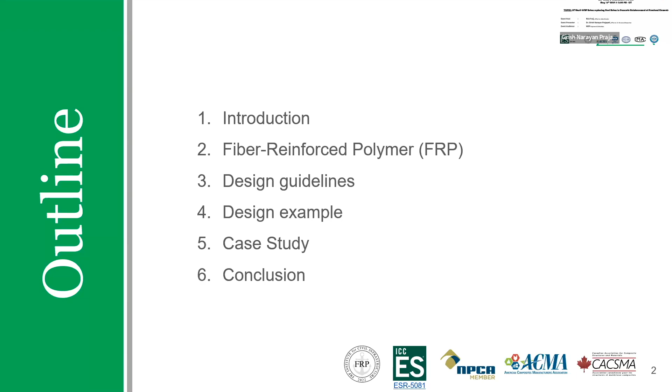So about our company, our products are mostly designed in Canada and are manufactured in China by Sandok Safety Industries Co. Limited, which is specialized in manufacturing fiber reinforced polymer products.

So we work with national and international engineering firms. We work with them through the design process and help them with the fiber reinforced polymer design standards, whether they are in Canada or in the United States. So we also focus on parking facilities, water treatment plants, and retaining walls. And our main focus is on the glass fiber bars and the carbon strap applications.

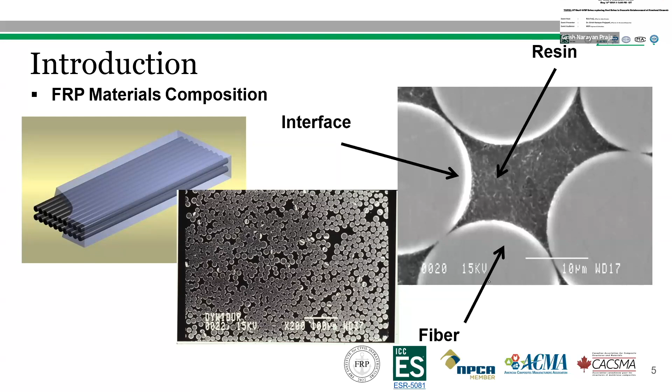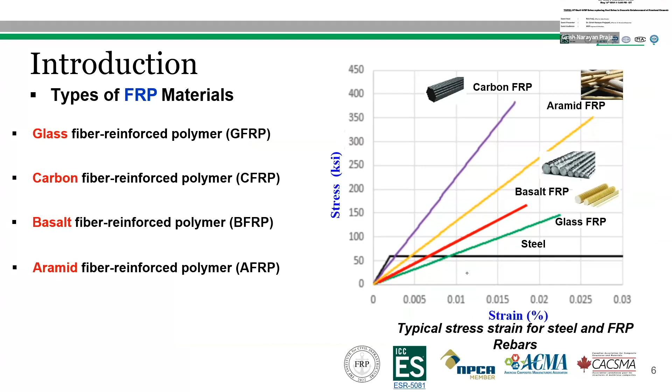There are 4 different types of fiber used in FRP reinforced polymer bars: glass, carbon, basalt, and aramid. Their stress-strain properties in comparison with steel bar are shown in this figure. So we can produce different types of FRP products depending on the project requirements.

Some of the FRP bars we produce are generally straight bars, spiral, stirrups for transverse reinforcement, bent bar, and glass fiber reinforced polymer shear connectors. The shear connectors are used in ICF walls.

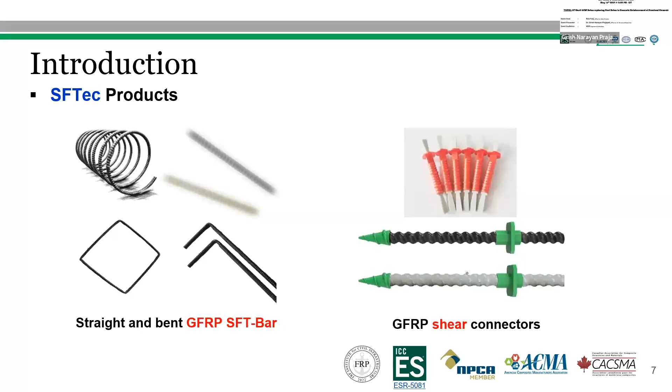So why should we use a GFRP bar instead of a steel bar? Here are some advantages of the glass fiber reinforced polymer bar over the steel bar. It has longer service life because of its corrosion resistance, therefore improved durability in harsh environments such as construction near coastal areas and in North American cold climates. The FRP bar has better resistance against corrosion compared to the steel bar.

The tensile strength of FRP bar is around 2 to 3 times more than that of the steel bar. I'm talking about the glass fiber reinforced polymer bar. If you consider carbon, it has even more tensile strength compared to the steel bar.

However, it is lightweight because of its low density compared to the steel bar. Due to corrosion resistance, FRP bars are good for harsh chemical environments, which we have in Canada, because of the cold we have to put alkaline salt during winter. It is also neutral to electrical and magnetic disturbance, useful for applications such as airports, military applications, and MRI rooms in hospitals.

Coming to the second section of this presentation about fiber reinforced polymer bars. There are different fiber external surfaces of FRP bars available in the market.

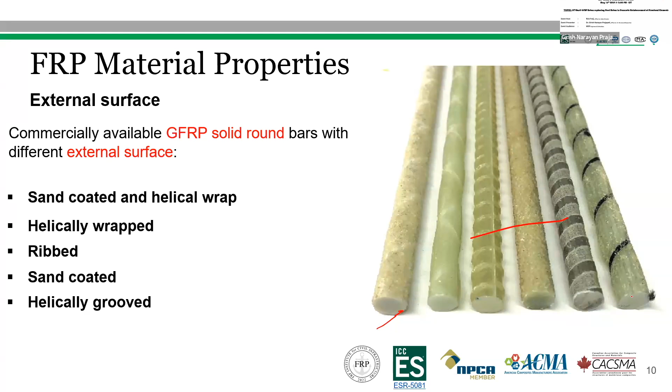Different available FRP bar shapes for reinforced concrete structures are straight bars, bent bars, and spirals. The Canadian and American material specifications such as CSA S807, ASTM D7957, and D8505 set minimum qualification and quality control properties for GFRP bars.

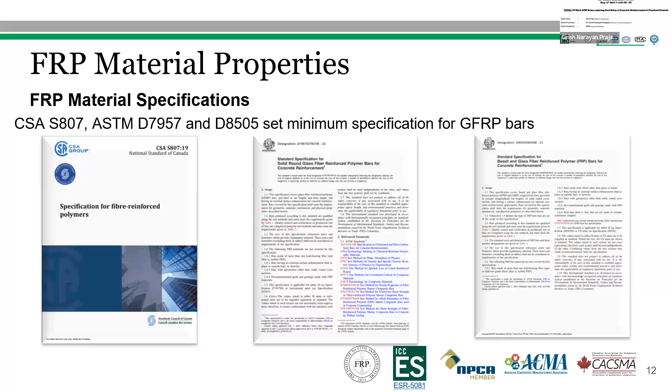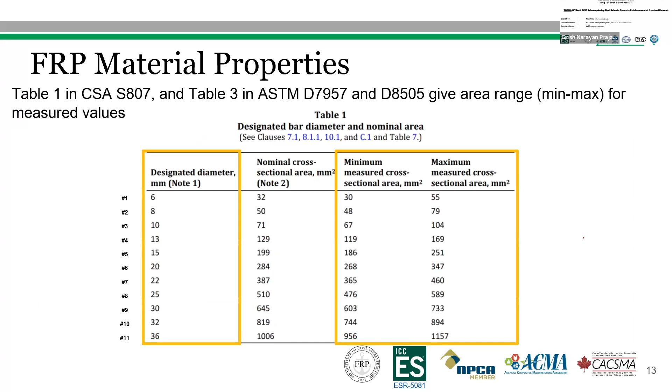So we'll go through them. Same as the steel bars, Table 1 in CSA S807 and Table 3 in ASTM D7957 and D8505 provide GFRP bar diameter and area range for measured values for any GFRP bar external surface.

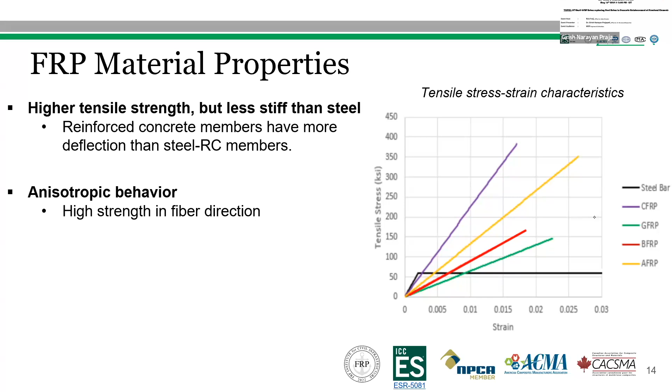FRP bars have high strength in fiber direction due to anisotropic behavior. The stress-strain behavior of FRP bars is linearly elastic up to failure, so they don't provide any ductility. However, this can be overcome by providing hybrid reinforcement of steel and fiber reinforced polymer bar. Current research is ongoing to implement hybrid reinforcement for the new ACI 440 design code.

Since the glass fiber reinforced polymer bar doesn't have any yield point, the guaranteed tensile strength of GFRP bars varies between 550 to 1350 megapascal. The guaranteed tensile strength is found by subtracting 3 times the standard deviation from the average tensile strength.

The GFRP bar has a lower average elastic modulus, varying between 45 to 60 gigapascal, and the guaranteed ultimate tensile strain of GFRP bars varies between 1.2 to 2.5%. Generally, this variation depends on the amount of fiber and resin content.

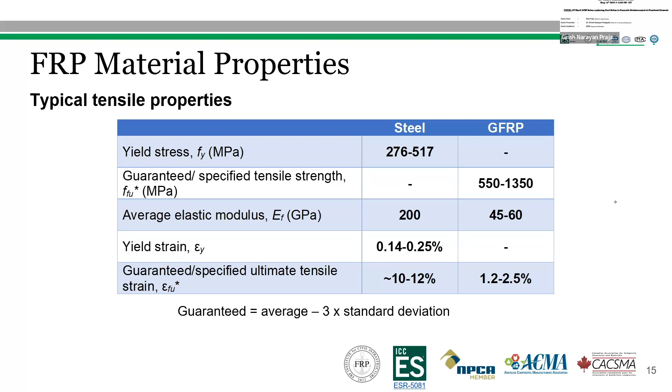The design tensile strength of the GFRP bar is calculated by multiplying a resistance factor, which is equal to 0.75 in CSA S806. This value was generally introduced in 2012, and the CSA S806 has not been updated since; it's only been reapproved until 2021.

In the next provisions, in the next updation of CSA S806, the value will be increased to 0.85. The latest ACI 440.11 design code uses an environmental reduction factor equal to 0.85, which is based on a research paper published in 2020.

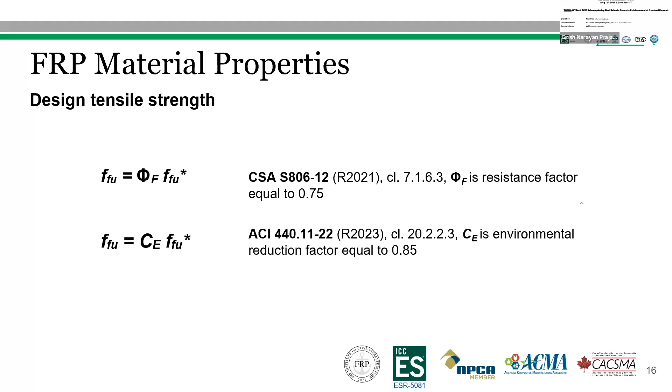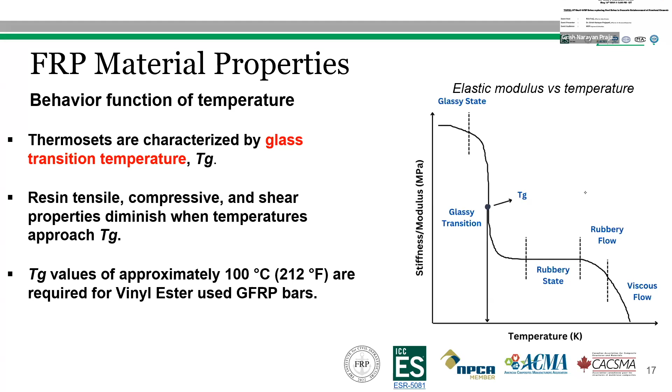A glass transition temperature of 100 degrees Celsius is required for vinyl ester, typically used in glass fiber reinforced polymer bars, and a lower glass transition temperature generally results from moisture absorption.

The physical characterization of the FRP bar is done through a series of experimental tests. The important tests include fiber content, to know the fiber mass content of the FRP bar, and the major cross-section area and the water absorption of the FRP bars are provided. The details of these tests can be found in the ASTM standard provided here.

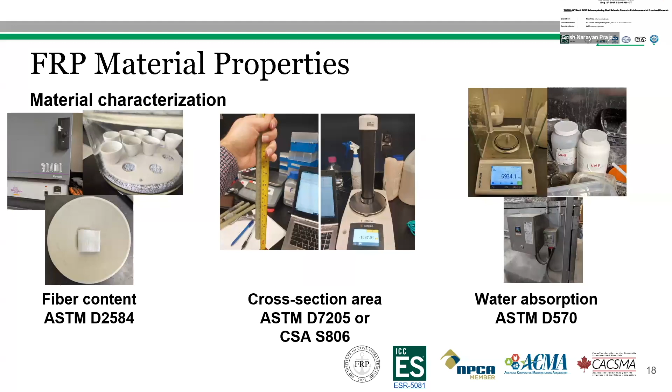The tensile properties of the GFRP specimen were tested in accordance with ASTM D7205 or CSA S806. The test specimen was prepared by installation of steel tube on both sides of the FRP bar using expansive cement. The tests were performed under a Baldwin testing machine, and the test load was applied until failure occurred.

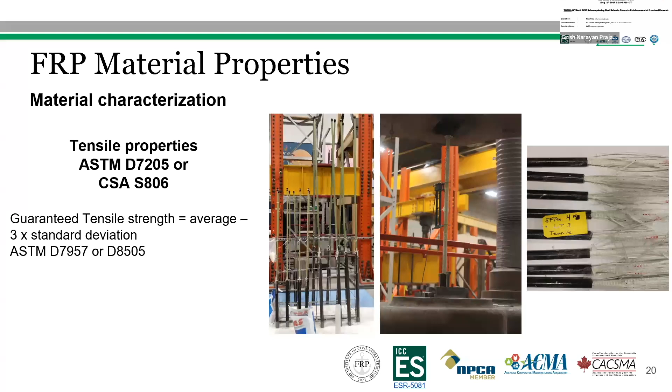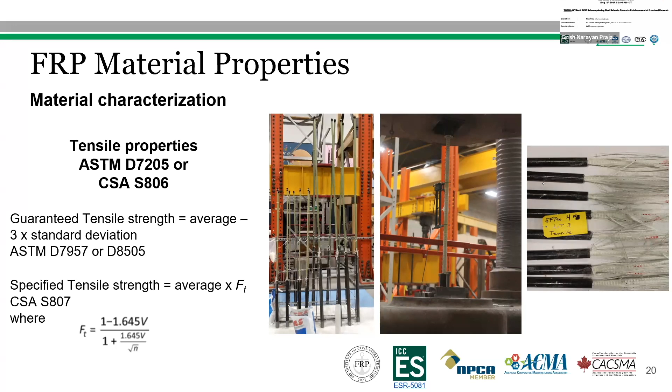According to ASTM D7957 or D8505, the guaranteed tensile strength was calculated by subtracting 3 times the standard deviation from the average tensile strength from the test. CSA S807 recommended use of specified tensile strength found by multiplying the average value with a factor FT. This factor is calculated by the following equation, where V is the coefficient of variation and N is the total number of samples.

The transverse shear strength and the horizontal shear strength of the GFRP bar were tested using an MTS universal testing machine. The displacement rate was selected to produce failure within 1 to 10 minutes, and the force was applied uniformly without subjecting the specimen to impact.

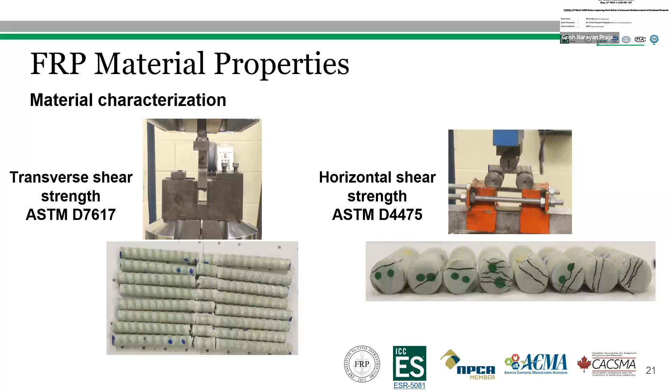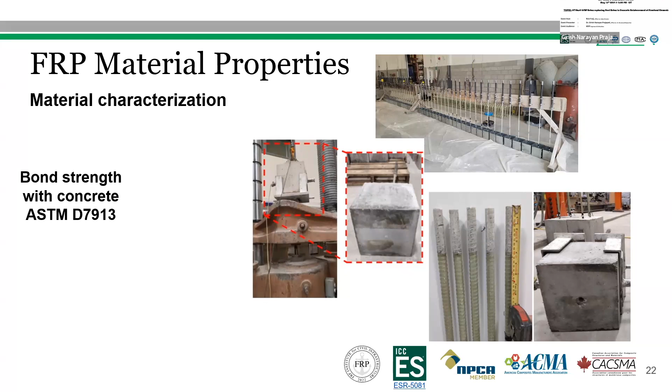Pull-out tests are performed to measure the bond strength between the reinforcing bar and the concrete. The GFRP bars were embedded in concrete blocks, and the concrete batch had a compressive strength of 35 megapascal. The pull-out test was conducted using a Baldwin testing machine, as shown in this figure.

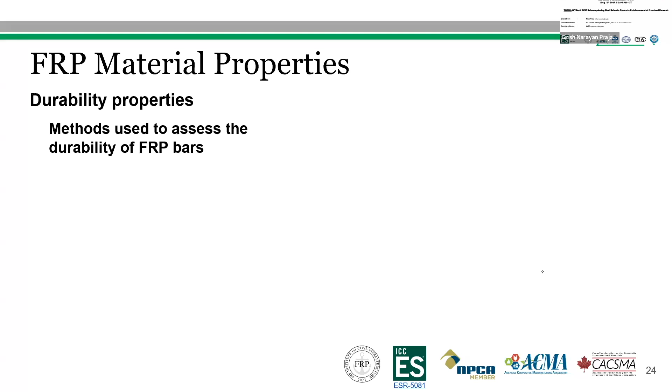The methods used to assess and validate the durability of FRP bars are accelerated aging or alkaline tests. In this case, we immerse the FRP bar in water with alkaline salt under high temperature, usually 60 degrees Celsius. This is a fast process, and testing is conducted after 3 months of immersion or exposure to the alkaline salt.

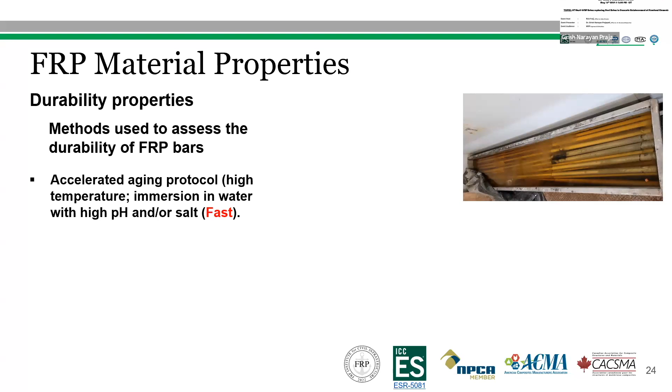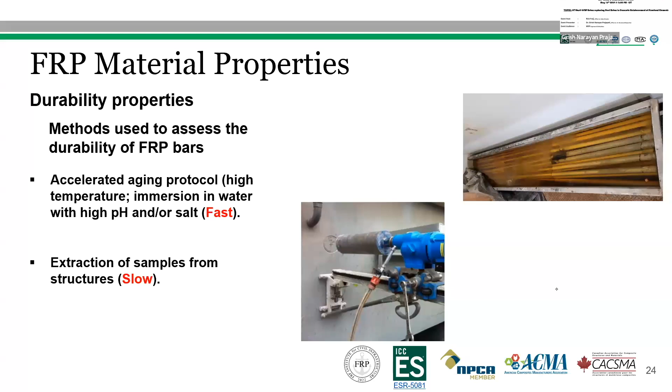The second process is the extraction of samples from the real structure. This is a slow process, and the test is conducted after 15 years of structure service.

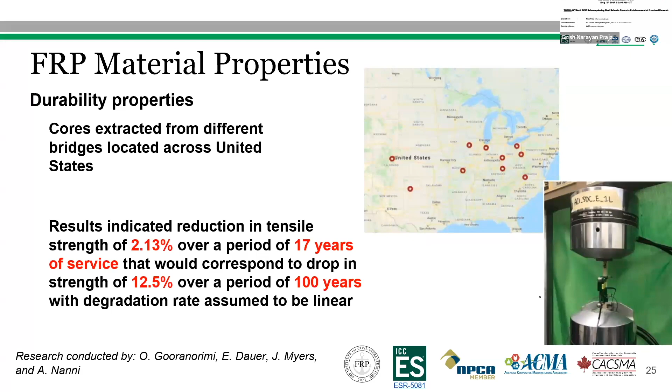The durability of GFRP reinforcement in concrete was assessed by extracting cores from different bridges located across the United States. The result indicated a reduction in tensile strength of 2.13% over a period of 17 years, corresponding to a drop in strength of 12.5% over 100 years, assuming a linear degradation rate. In the next section, we'll talk about the design guidelines.

The currently available design standards for design and construction of building structures with FRP bars are ACI 440.11 and CSA S806, where ACI 440 only recommends considering GFRP bars. For highway bridge design, the available design standards are AASHTO (2018 edition) and CSA S6, and chapter 16 of CSA S6 considers the FRP bar.

The assumptions made in the design of FRP reinforced concrete structures, according to both CSA S806 and ACI 440, are that plane sections before loading remain plane after loading, which means the strain developed in concrete is proportional to the strain developed in the FRP bar.

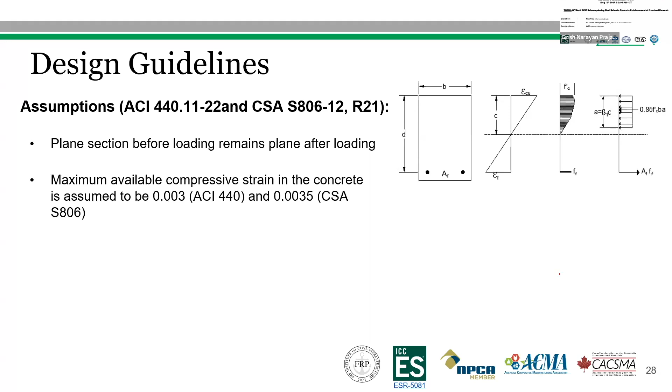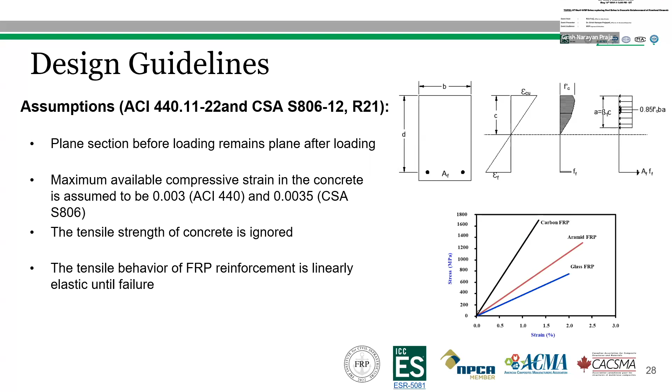The assumed maximum allowable concrete compressive strain is 3000 microstrain according to ACI and 3500 microstrain according to CSA S806. The rupture strength of the concrete is very low and should be ignored in the design. The tensile behavior of the FRP reinforcement is considered linearly elastic until failure, and a perfect bond is assumed to exist between concrete and the FRP bar.

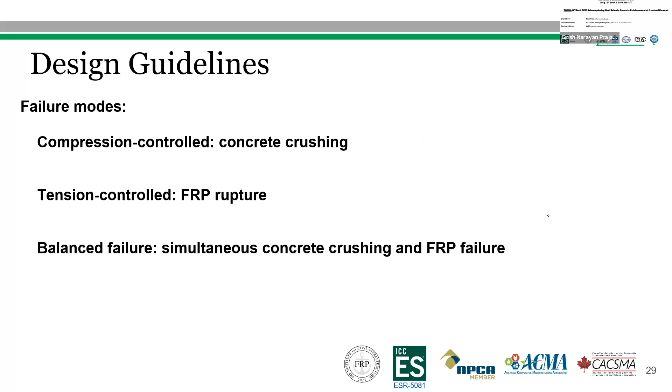There are three different failure modes in flexural members: compression control, tension control, and balance failure. We'll go through them one by one.

The compression control design of the flexural member will cause the concrete to crush prior to FRP rupture. Therefore, this section can be called an over-reinforced section, where stress in the concrete is non-linear.

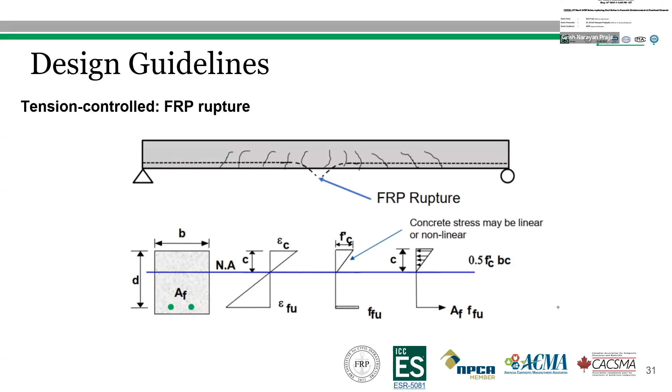In the tension control design, the FRP bar fails first in the flexural member, and the stress developed in concrete may be linear or non-linear, and the section is under-reinforced.

Simultaneous concrete crushing and FRP rupture occur in the case of balance failure.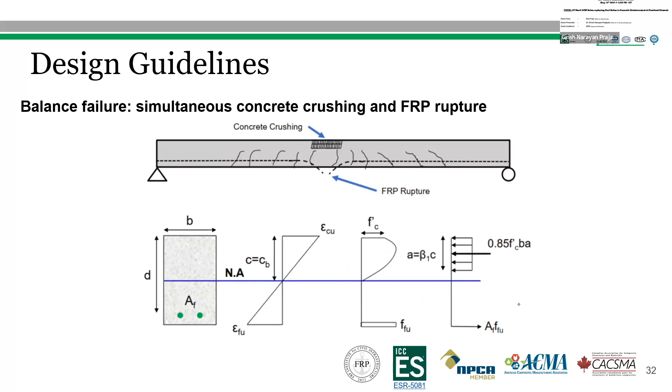The general considerations for the design of GFRP reinforced concrete flexural members are: the flexural capacity of an FRP reinforced concrete member depends on either tension or compression mode of failure, that is, FRP rupture or concrete crushing.

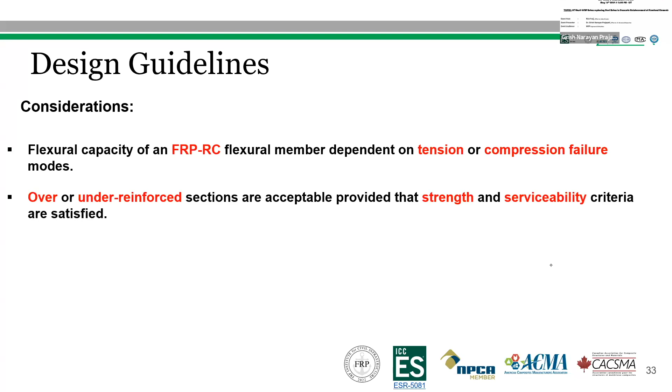Over-reinforced or under-reinforced sections are acceptable for the design. However, it should meet the strength and serviceability criteria.

FRP reinforcement is brittle, but it provides warning in terms of large member deflection. The flexural behavior of FRP reinforced concrete members is not ductile, so resistance factors are used. Small resistance factors are used for FRP reinforcement.

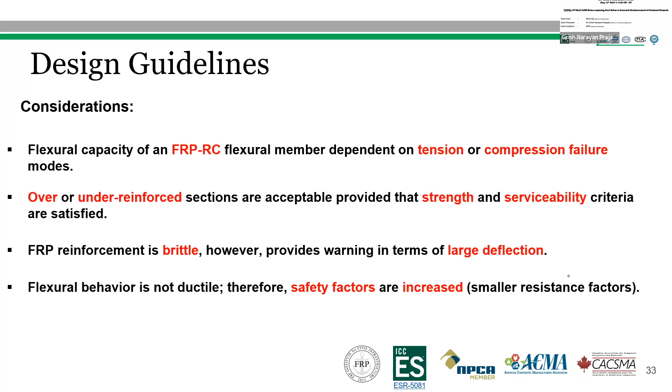The following serviceability criteria is required: the stress under sustained and cyclic loading should be checked to avoid creep rupture and fatigue rupture.

The substitution of FRP bar for steel bar on an equal area basis would result in large deflection and wider crack width.

The design is governed by deflection under service load and crack control. Excessive cracking is undesirable for aesthetic and other reasons, and deflection should be within the acceptable limit to support such as non-structural elements.

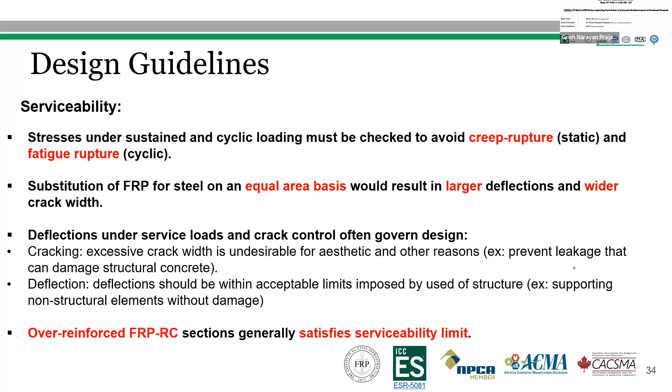Over-reinforced or compression control sections typically satisfy the serviceability limit for the FRP reinforced concrete section.

The bond coefficient accounts for the degree of bond between the FRP bar and the surrounding concrete in ACI and CSA design standards. If the bond coefficient is lesser than 1, it is found to be better than steel.

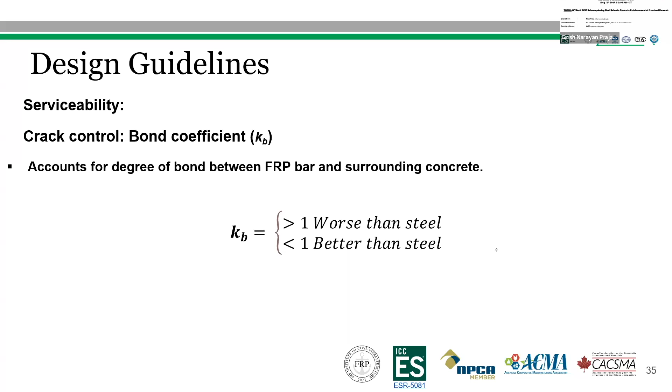The bond coefficient generally depends on the external surface of the FRP bar, and it generally varies between 0.7 to 1.2. According to ACI 440, it is taken as 1.2.

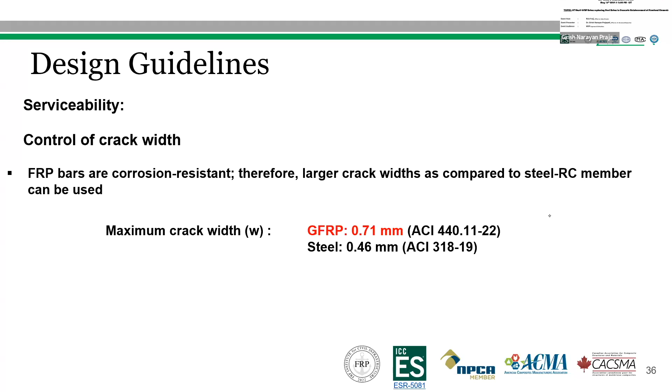Since FRP bars are corrosion resistant, wider crack widths as compared to steel reinforced concrete members can be tolerated. According to ACI codes, the maximum crack width for GFRP bar is around 0.71 millimeter.

Now coming to the first design example, which is the design of a fiber reinforced polymer reinforced concrete flat slab.

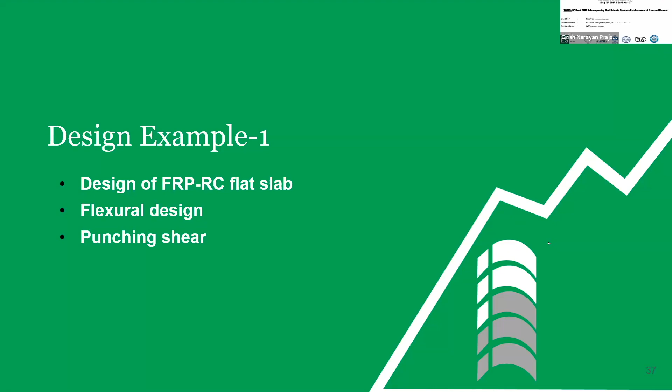It is a prototype of a parking garage flat slab, and the thickness of the slab is 200 millimeter, all columns measure 300 by 300 millimeter, and the concrete compressive strength is 40 megapascal.

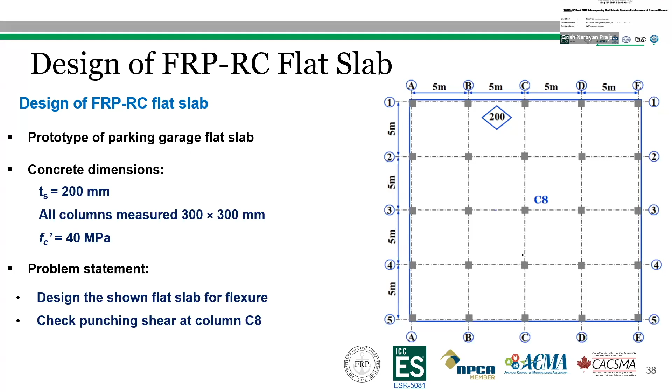The problem statements are: first, I will show how to design the flat slab for flexure, and second, checking the punching at the interior column C8.

The first step in flexural design is to calculate the design load. The load is specified in the National Building Code of Canada, and we are calculating the service load and then the ultimate load, so that the dead load is simply the weight of the concrete plus the partitions.

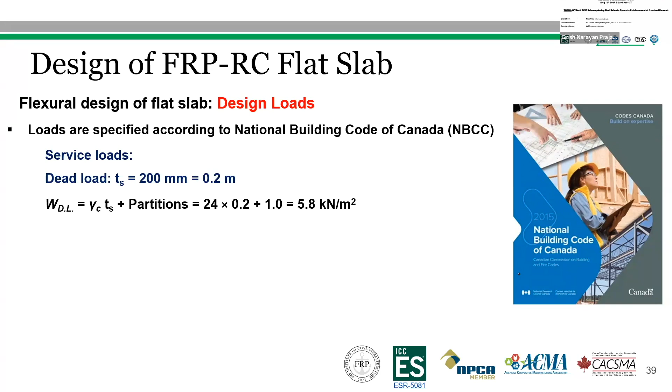The weight of the concrete is equal to 24 kilonewton per cubic meter multiplied by the thickness of the slab, which is 200 millimeter. And according to NBCC, the partitions in a parking garage equal 1. So we have a dead load of 5.8 kilonewton per square meter.

The live load is taken as 2.4 kilonewton per square meter in accordance with NBCC for parking garage. So finally, we have the service load, which is the sum of dead load and live load, equal to 8.2 kilonewton per square meter.

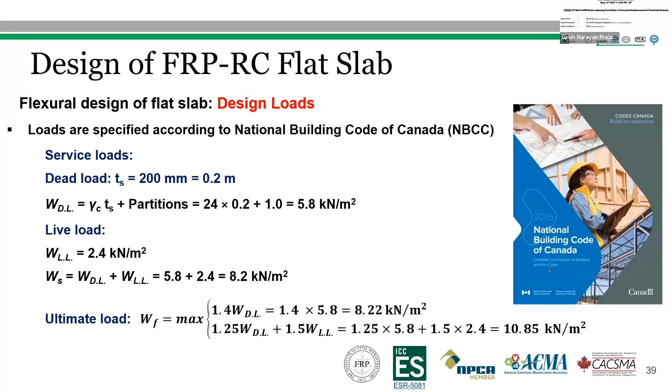The ultimate load is the maximum of either 1.4 times dead load, or 1.25 times dead load plus 1.5 times live load. The second provides the maximum value of 10.85 kilonewton per square meter, which will be the ultimate factored load for the present case.

The second step in the flexural design is to estimate the straining action on the floor as the negative or positive moment and shear forces. So now we'll consider that we have the value of the factored moment from analysis.

The next step will be to estimate the amount of FRP bars, and all sections are checked to be designed as compression control as per Canadian Design Code CSA S806. The over-reinforced section means that the provided reinforcement is greater than the balanced reinforcement.

So now we have the resistance moment from this equation and the factored moment from the analysis, and we compare the resistance moment with the factored moment. The resistance moment should be 1.5 times greater than the factored moment. If we design following this step, we get a flexural reinforcement ratio of 1%.

Further, the design should also satisfy the minimum reinforcement, which is equal to 400 times the modulus of elasticity of the FRP bar divided by gross cross-section area, and this term should be greater than 0.0025 times the gross cross-sectional area.

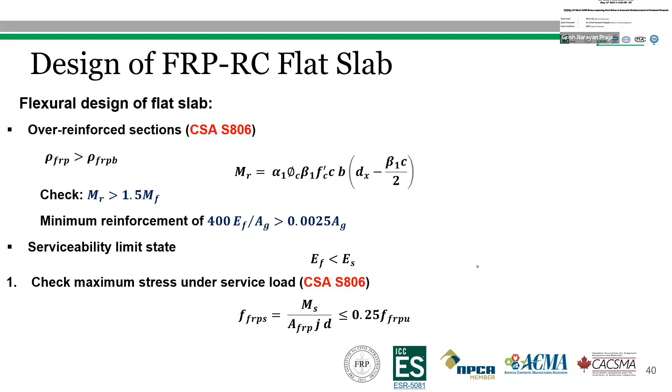Since we know the maximum stress in the FRP bar under service load and the modulus of elasticity of the FRP bar, we can get the ultimate strain under the service condition. When the maximum strain in the FRP bar under service load exceeds 0.0015, the crack width parameter Z should be verified.

The crack width parameter Z as per CSA S806 could be checked using this equation, and the value of Z should be less than 45,000 Newton per millimeter for interior exposure and 38,000 Newton per millimeter for exterior exposure. In parking flat RC slab, it should satisfy the 38,000 Newton per millimeter criteria.

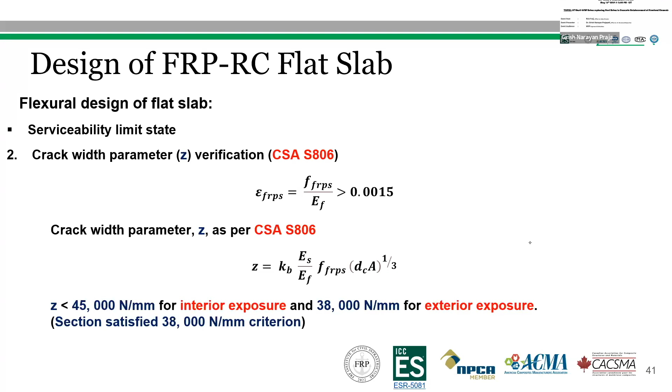So we did the required check for serviceability. Now let's do it for the punching shear at the interior column C8 using Canadian standard CSA S806.

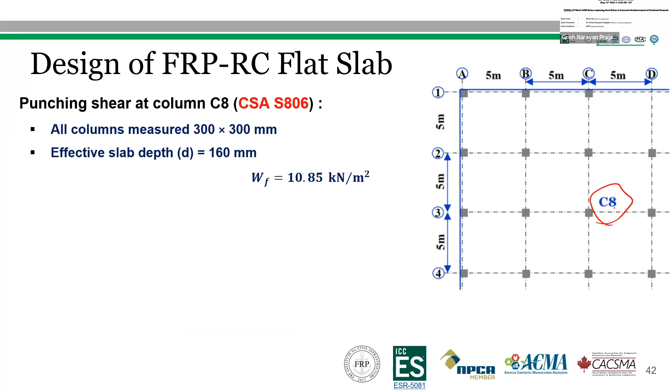The cross section of the column is 300 by 300 millimeter, and the effective depth of the slab is 160 millimeter, and the ultimate factored load is 10.85 kilonewton per square meter.

The first thing we need to find is the critical shear area. The critical shear area is at distance d/2 from all faces of the column, and we know that the column cross section is 300 by 300. So the side length of the critical area will be C plus D, which is equal to 460 millimeter.

Now we need to find the tributary area. The shaded part is the tributary area, which is the area of the surrounding slab minus the critical shear area, and is equal to 24.8 square meter.

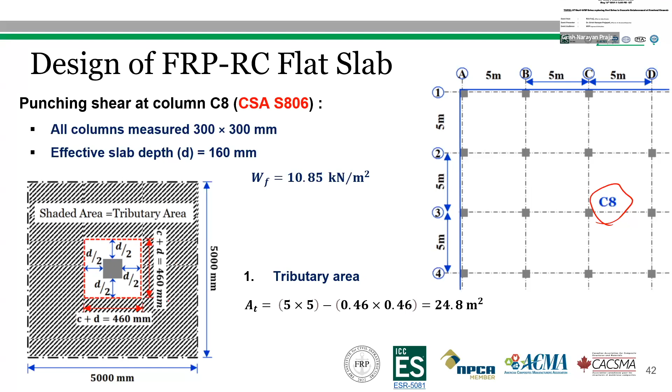The ultimate punching shear force is the factored load multiplied by the tributary area, which is equal to 269 kilonewton.

Before calculating the punching shear stress, we need to calculate the punching shear perimeter, which is equal to 4 times the side length of the critical zone. The critical zone is 460 by 460 millimeter, and 4 times the 460 millimeter is 1840 millimeter.

The ultimate punching shear stress is the ratio of the ultimate factored shear force divided by the punching shear perimeter and the effective depth of the slab, and is equal to 0.91 megapascal.

For the present case, alpha S is equal to 4, and beta C is the ratio between the long side and the short side of the column, and is equal to 1.

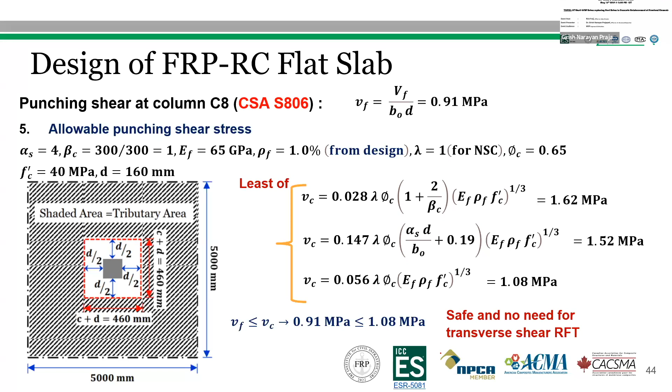By comparing the ultimate factored shear stress with the allowable punching shear stress, the ultimate factored punching shear stress is lower than the allowable value. So our structure is safe, and therefore there is no need for transverse shear reinforcement.

Coming to the next design problem, which is the GFRP reinforced concrete retaining wall. This is a simple example of a cantilever retaining wall, which is a rigid wall used for supporting soil laterally so that it can be retained at different levels on the two sides.

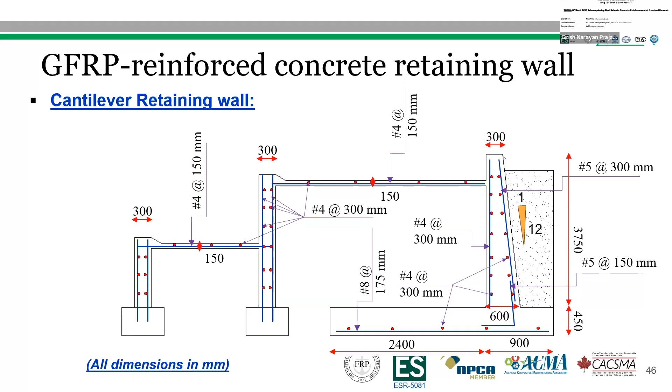The current drawing shows a cantilever retaining wall designed with steel bars. All the sections shown are a steel bar design, and we are going to convert it to GFRP bar. From this example, we'll learn how we are going to convert a steel bar design to a GFRP bar design.

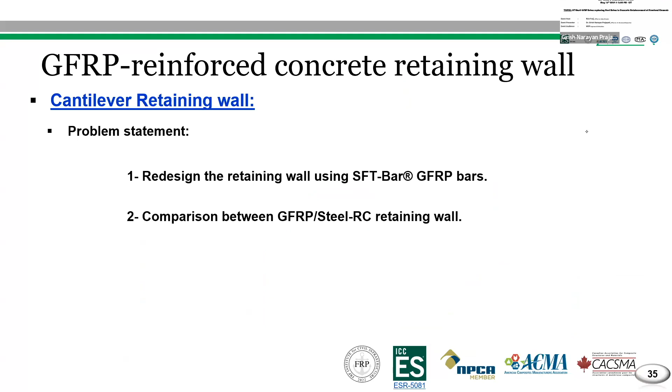Our problem statement is, we have to redesign the section using the SFTec GFRP bar. Finally, we'll compare both steel and GFRP reinforced concrete retaining wall.

The available data includes data for the concrete, steel, and SFTec GFRP bars. We need to calculate the load, which includes both lateral loads as well as vertical loads.

In the second step, we have to check for stability, including overturning moment, sliding, and soil stresses. Since we are converting a steel reinforced retaining wall to a GFRP reinforced retaining wall, we assume that these checks have already been done.

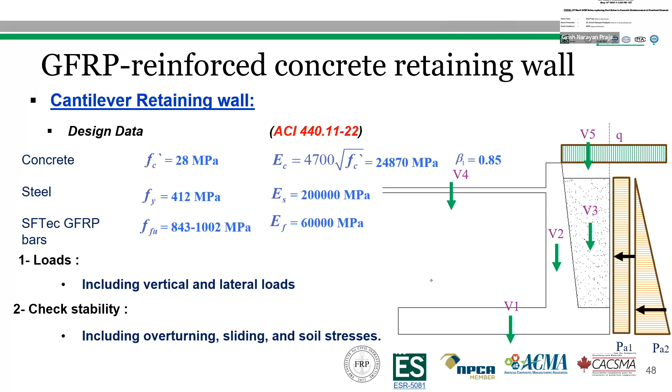Now we will analyze the retaining wall, and the factored moment is considered equal to the ultimate capacity of the steel reinforced concrete retaining wall.

So for equilibrium, we can get the depth of neutral axis C and just check the failure conditions using the strain distribution, which is subject to tension failure.

Then the moment for each section was calculated using this equation, and the moment capacity of each section along with the provided steel area are listed in this table.

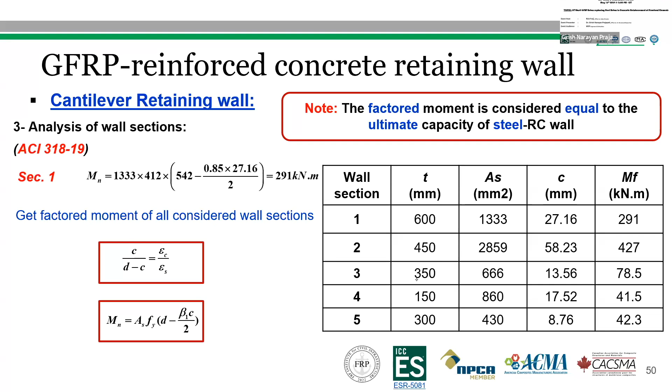Coming to the design of the GFRP reinforced concrete retaining wall, the reinforcement ratio is calculated as the area of the FRP bar provided for each section, considering the same area as the steel bar. For the calculation of the reinforcement ratio, D is the effective depth as given in this table for each of the sections.

Now we will only consider section 1 for the design, and the design for the rest of the sections will be the same. For the design, we have to apply a reduction factor, and in case of GFRP reinforced concrete, we have to apply a different reduction factor depending upon tension failure or compression failure.

If the reinforcement requirement is greater than or equal to 1.4 times the balanced reinforcement ratio, then it is a compression failure, and our reduction factor is 0.65. For tension failure, the reduction factor is 0.55.

For the design tensile strength, the different sizes of SFTec GFRP bar can be found out by multiplying 0.85, which is the environmental factor according to ACI 440.11.

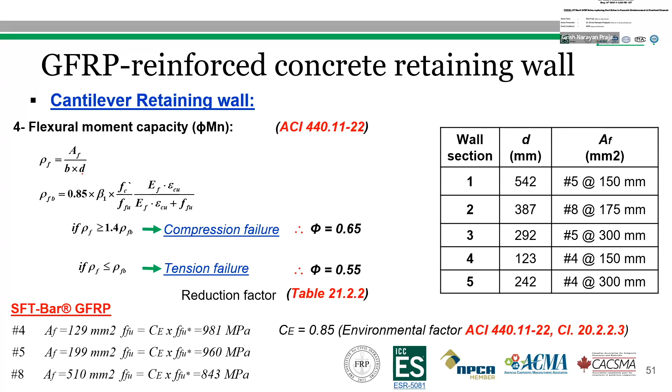The design flexural strength of section 1 of the stem was calculated by assuming 1 meter wide, and it was found that the reinforcement ratio was lower than the balanced reinforcement ratio.

So the section is designed as a tension control section, and the provided reinforcement was checked with the minimum reinforcement because it was a tension control section.

The design flexural strength calculation is done for section 2 to show how the moment capacity is calculated for a compression control section, where the provided reinforcement ratio is greater than 1.4 times the balanced reinforcement ratio. So we have considered a reduction factor of 0.65.

The stress in the FRP bar is calculated using this equation and is equal to 658 megapascal, which is lower than the ultimate tensile strength of the GFRP bar.

The nominal and the factored design flexural strength is calculated using this equation, where A is the depth of the rectangular concrete stress block. The factored design flexural strength is greater than what we require, 433 kilonewton meter, which is greater than 427. Here the minimum reinforcement doesn't apply because the section is compression control.

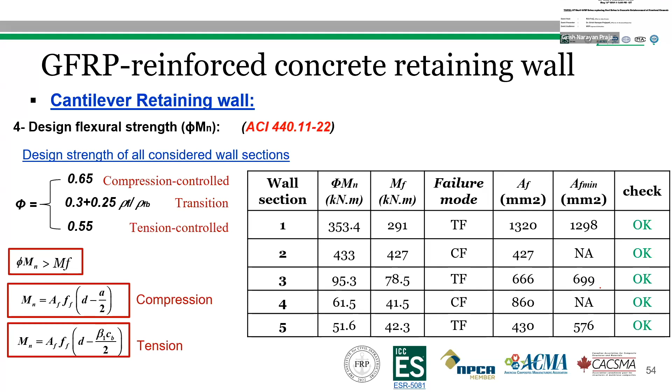Following the similar process, the design strength for the rest of the sections was calculated along with the minimum reinforcement. For section 3 and section 5, the minimum reinforcement is greater than the provided reinforcement, so we'll provide minimum reinforcement for section 3 and section 5.

As mentioned before, for GFRP sections we need to check the serviceability limit, so we apply these checks on the cantilever retaining wall. We need to check the service level stress in FRP bars. In this equation, MS is the service moment, and NF is the modular ratio of the elastic modulus of GFRP bars to concrete. The factor K is calculated using this equation for a transformed section, and ICR is the cracked moment of inertia.

For section 1 of the retaining wall, the service level stress was around 261 megapascal, which should be lower than the GFRP stress calculated using equation 24.3.2.2. Here, DC is the effective depth, 58 millimeter, and Beta C is a coefficient equal to 1.12. The value here is 277 megapascal, which is greater than the service level stress in the FRP bar.

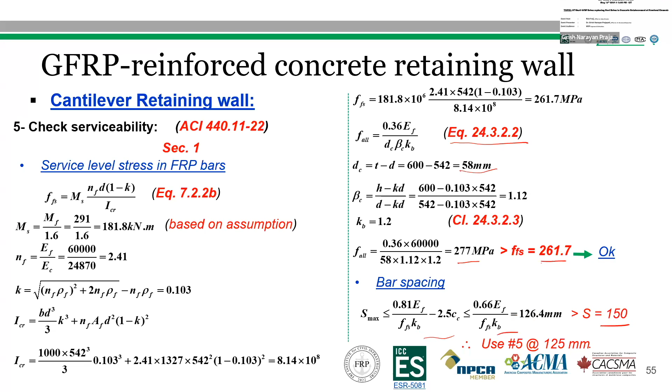We also need to calculate the bar spacing using these two equations, and we found that the bar spacing is less than what we provided. We provided 150 millimeter, but for the serviceability requirement, the requirement is 126.4 millimeter, so we will reduce our spacing to 125 millimeter. Following the similar process, we'll check the serviceability for the rest of the sections.

In step 6, we are going to find the longitudinal shrinkage reinforcement. In addition to providing the main reinforcement with FRP bar, another reinforcement should be provided to control shrinkage and temperature cracks. According to ACI 440.11 clause 24.4.3.2, the shrinkage reinforcement can be calculated using 140 divided by the elastic modulus of the GFRP bar, and this value is equal to 0.23%.

The maximum spacing should be limited to the minimum of 300 millimeter or 3 times the thickness of the wall. Based on this criteria, the calculated longitudinal reinforcement is provided in this table, and all the provided GFRP reinforcement details are shown in this drawing.

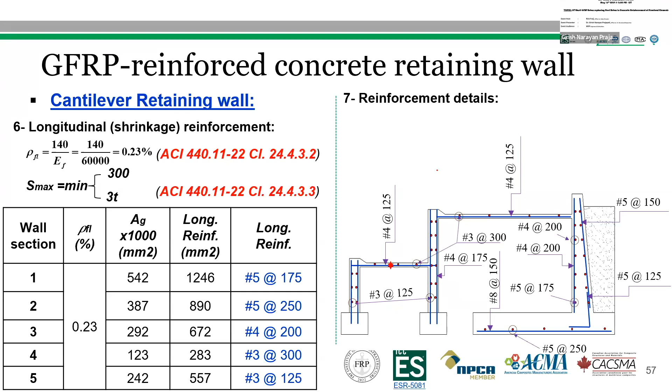Finally, we'll compare the steel and the GFRP bar for the cantilever retaining wall. It was observed that the required GFRP bar was more than the steel bar because of the serviceability limit. However, the overall cost can be reduced, which we will discuss in the next part of the presentation.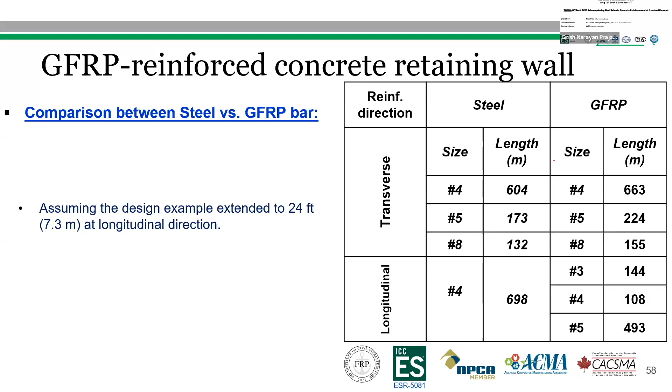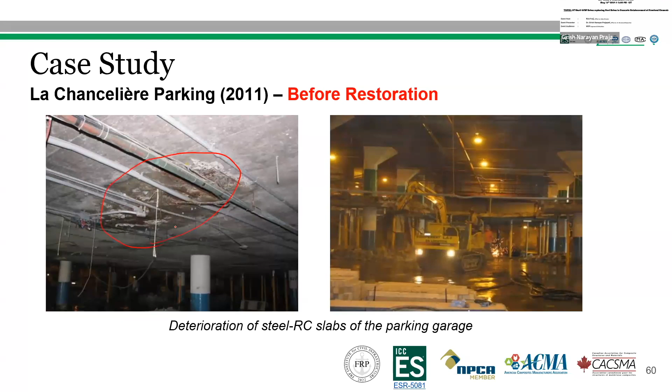Here I will talk about a case study showing a parking garage slab. This is a complete parking garage project for which we will see a cost analysis comparing steel with FRP bar. The following photos were taken before the restoration, and we can see the damage to the steel bars and the steel reinforced concrete slab in this photo.

The project we are discussing is a collaboration between University of Sherbrooke and the City of Quebec. If you look here, the total cost using steel reinforcement would be around $831,400. When using GFRP bar, the total cost comes around $794,450, which is a saving of around $37,000 by building with FRP bar.

Although the product they used to reinforce the concrete was twice the price of steel, they saved money by avoiding waterproofing and installing asphalt, which is not necessary when using FRP reinforcement.

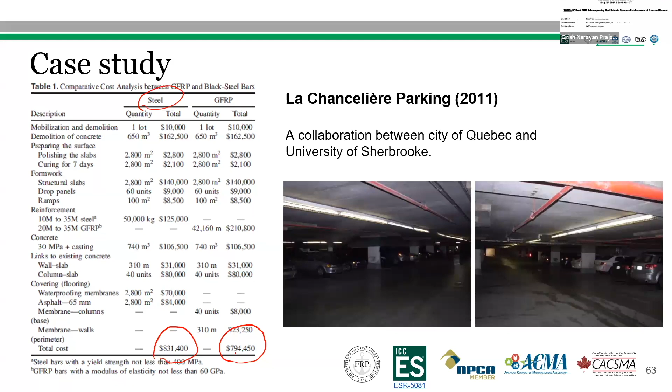The parking garage project was not with us, and it was a very old case study. The question now is, what is the price of GFRP bar compared to steel bar? Our bars are normally more expensive than steel, but how does that affect the total cost of a project? There is an actual project here.

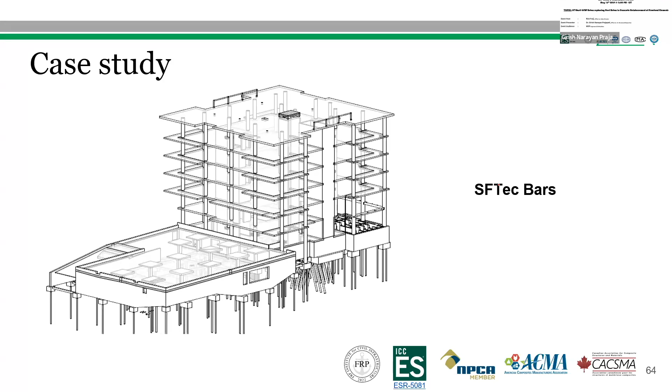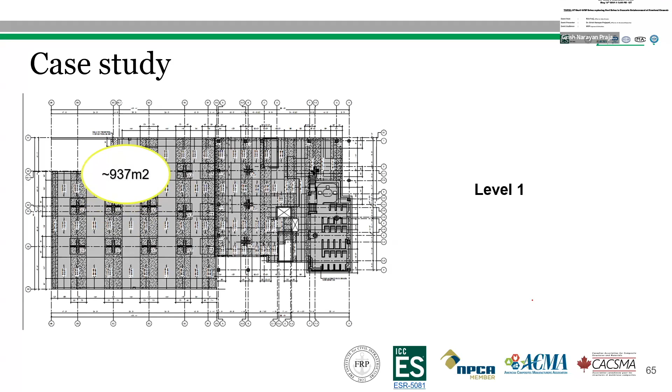We worked with the client to help them convert steel to FRP bar. The building is a hotel where the client considered FRP in seven slabs of this building. The first slab is the most important and the largest, divided into two parts: one where the reception will be installed, and one where there will be a garage. The part where we can have more savings is around 937 square meters.

This table presents the financial numbers, and we see apart from the slab at level 1, the amount of reinforcement is more or less the same. This is because, as we know, the amount of FRP reinforcement in each slab is normally greater than steel because of the serviceability limit. The steel reinforcement total is around $126,912, whereas for GFRP it is $130,500.

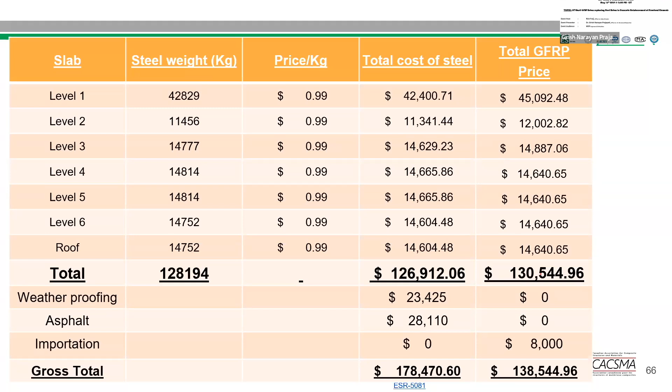However, this number doesn't consider the other potential or future savings. There are costs of transporting steel to the site, and these costs are generally higher because steel is 4 times heavier than the FRP bar.

The same fact affects the labor cost at the construction site. If a worker carries 5 bars of steel per trip, he will be able to carry 15 to 20 bars of FRP per trip, and this translates to savings of almost 25% on labor cost.

And finally, long-term savings for building owners and operators, because with FRP reinforcement there is less maintenance and concrete restoration work.

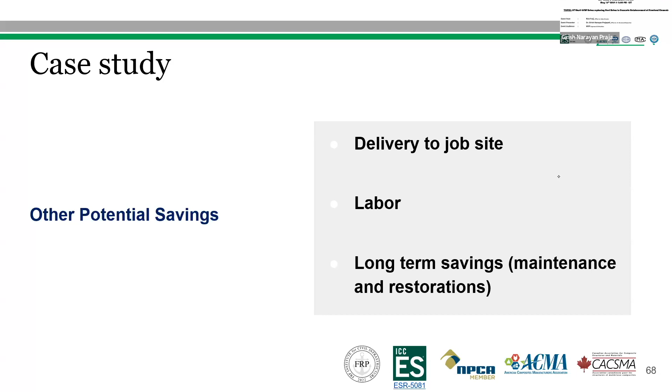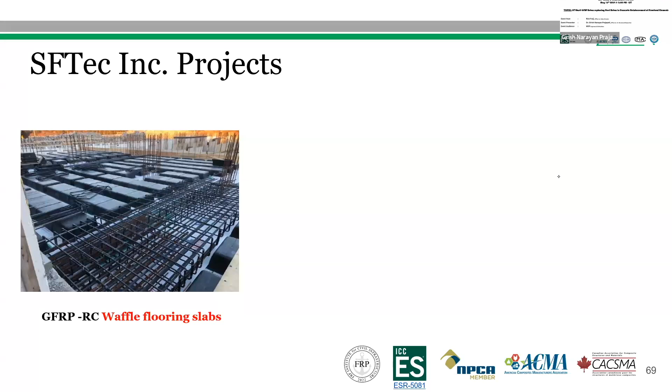Here are some selected field applications of the SFTec FRP bar we have already done in Canada. A GFRP reinforced concrete waffle flooring slab designed with the SFTec glass fiber reinforced polymer bar was built in Halifax, Nova Scotia. The FRP bar can also be used for slab on grade.

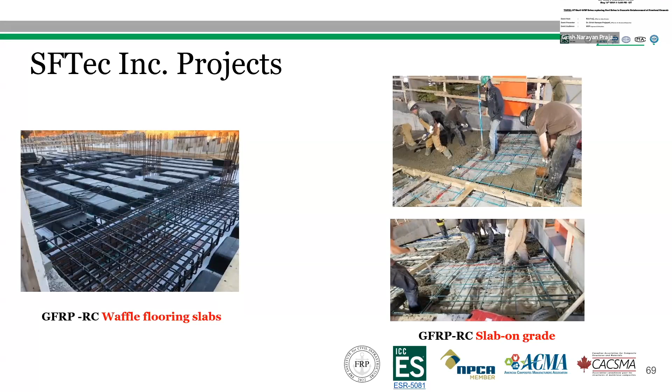It is a non-structural slab, a one-to-one replacement, and it saved a lot of money compared to steel bar in terms of labor and transportation. Another project shows cast-on-site precast sandwich panels, and they used our glass FRP bars in their project as reinforcement.

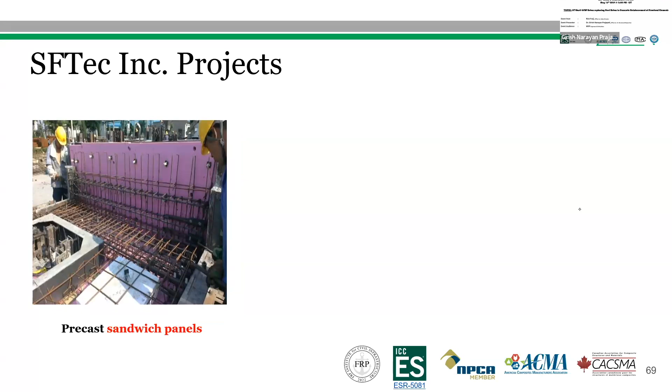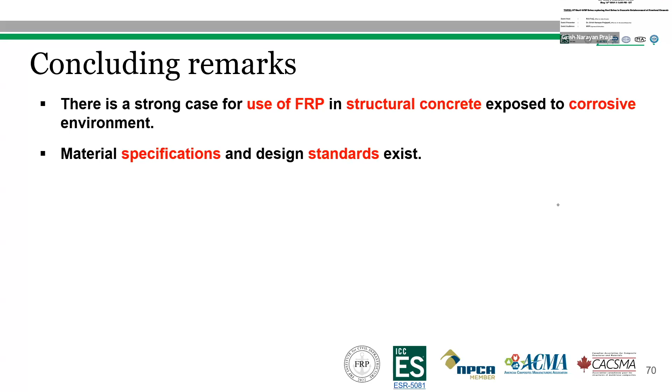In conclusion, due to the corrosion resistance issues generally prevalent in North America, FRP bar could be used in structural concrete to improve the service life of the structure. The Canadian and American material specifications as well as the design standards are available.

The flexural capacity of the fiber reinforced polymer reinforced concrete member depends on FRP rupture or concrete crushing failure modes. Therefore, either under-reinforced or over-reinforced sections can be used to design FRP reinforced concrete members. The serviceability requirements such as cracking and deflection govern the design, and the allowable stress under static and cyclic loading must be checked to avoid any creep rupture and fatigue rupture.

The presented case studies have shown potential savings with FRP bars. The transportation and labor costs are reduced due to the lighter weight of the FRP bars and due to the corrosion resistance, the FRP bars provide better service life, which indicates long-term savings.

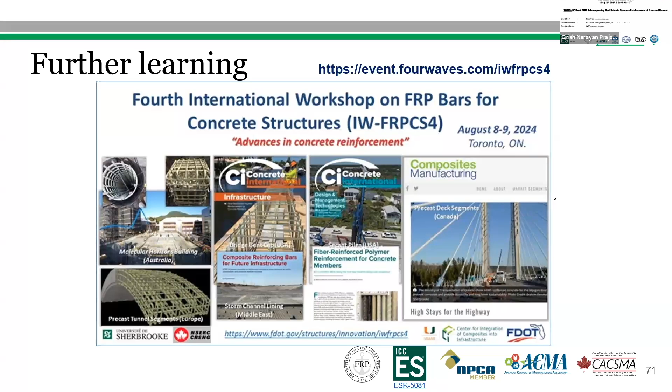In this workshop, speakers from industry and academia will present their experience with FRP bars and the current research going on with FRP bars for concrete structures. Thank you for your attention.